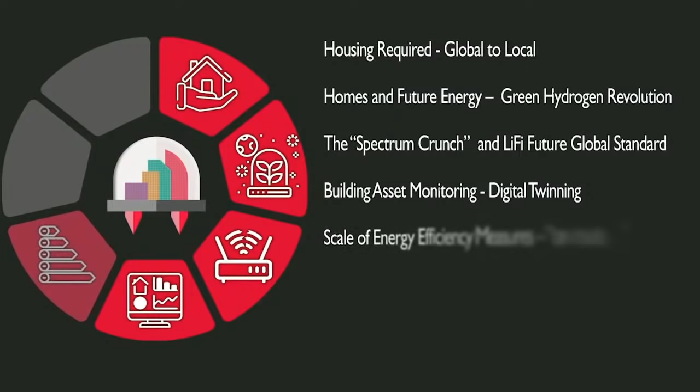Today I'm going to cover a number of things: future housing requirements from local to global, the green hydrogen revolution currently underway, the spectrum crunch, and new technologies to come such as Li-Fi and how we'll incorporate this into buildings and assets in homes of the future. Also building asset monitoring and the role of digital twinning in future sensors, which is becoming really interesting and starting to take off. The scale of energy efficiency measures which are en route and definitely going to happen, so it's useful to plan and look at that route map. And the mixing of terms - net zero, carbon neutral, and zero carbon - we'll briefly touch on that.

Finally, some of the areas we currently work in the construction sector - our operations, delivery, and products - actually wouldn't be included in some of the net zero requirements of procurement by local authorities right now. As a result, we need to make sure that instead of focusing entirely on net zero, which might dissuade people from undertaking fantastic work in materials and other areas, we keep that momentum going and include it under a Horizon Net Zero type approach.

In addition, because people are also living longer, there isn't the same cyclability of homes coming back onto the market. So taking the population growth over the next 80 years, plus people living longer and the lack of recyclability of housing coming back onto the market, collectively roughly 2.1 billion new homes will have to be built in the next 80 years.

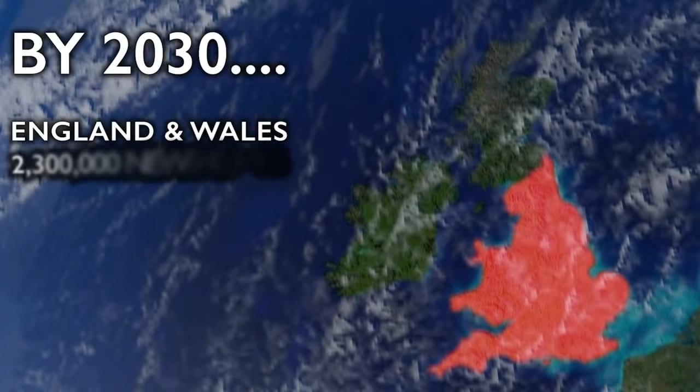To give you a sense of scale, that's equivalent to building the whole of Europe seven times in the next 80 years. In England and Wales, by 2030 - just the next 10 years - roughly 2.3 million homes will need to be built, equivalent to building the whole of Yorkshire and the Humber regions all over again.

In terms of Scotland, Scotland's new housing need will be roughly 260,000 new homes in 10 years' time by 2030, equivalent to building the whole city of Edinburgh again.

Green hydrogen is really starting to take off, and we've seen significant investments coming into this area just now, both from utility companies and oil and gas companies, with major global companies switching investment, particularly into green hydrogen. It's also useful to know your hydrogens.

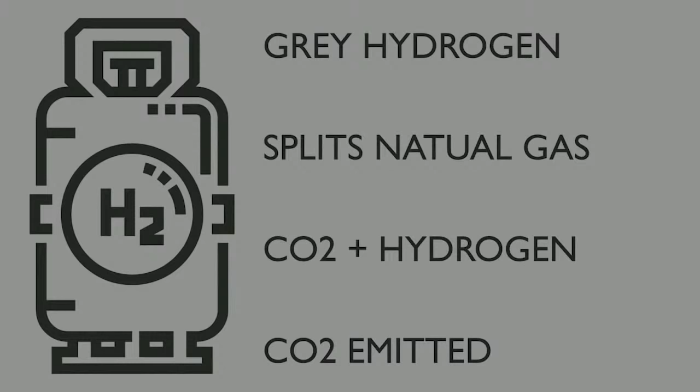Quite a bit of the hydrogen we see today is known as grey hydrogen, which splits natural gas into CO2 and hydrogen, but unfortunately still emits the CO2. Blue hydrogen has also been gathering pace recently, where the residual gases are stored or reused.

But green hydrogen is the one most people are favouring, because in green hydrogen we split water into hydrogen and oxygen by electrolysis, and that electrolysis is powered by wind and sun, so it's using renewable energy.

Goldman Sachs projected a $20 trillion future global market value for the hydrogen sector, with the predominance of that being green hydrogen. For the UK economy by 2050, it'll be worth £320 billion.

One thing we've all noticed with the COVID era, working from home and various other changes, is that we're all utilising the internet and Wi-Fi far more. And it's amazing how far it's come.

The Wi-Fi development has been over a period of about 30 years, of which the vast majority of the infrastructure was built in the last 10 to 15 years. It's amazing - internet users in 1995 were 16 million. Now, 24 years later, there are 4.8 billion.

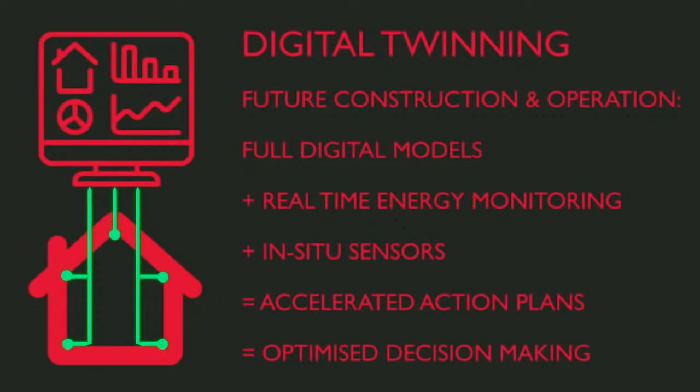With COVID, there's been lots of changes, as you may be aware. The lack of people going into work because they're working from home is creating an adaptation and also a requirement for city authorities to think about how they adapt and renew their city centres.

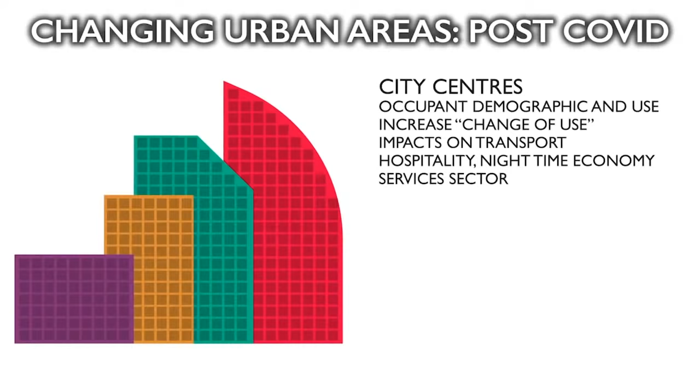In addition, we have the growth in the potential of 20-minute neighbourhoods, in suburban or other parts of cities, where people feel that they have access to and can live fairly sustainably within their own neighbourhood within a 20-minute walk or cycle, and that all of the facilities and services are there, particularly more so if people can also do home working.

One of the things I'd like to raise, an area we're going to be looking at in Edinburgh, is the potential utilisation of gap sites within future 20-minute neighbourhoods. When looking at a 20-minute neighbourhood plan, what are the potential gaps? If there are gap infill sites or regeneration sites, how do you align the 20-minute neighbourhood aspirations with the future utilisations of those gap sites?

And also the integration with transport needs and also the amenities. It's all sorts of things that could be changing. For example, nursery provision locally, because people are no longer going to their office as much, they're actually working from home, and they would rather use the nurseries which are close to the home as opposed to the one that was near the city centre, near their office.

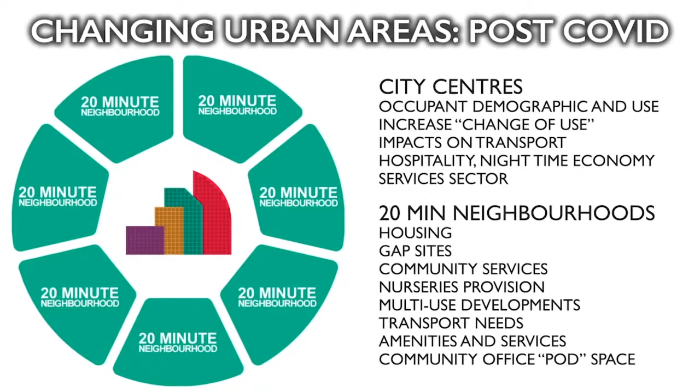So in terms of that, we've also got changes to the nighttime and city hospitality and culture factors to come too. With our future buildings, there are changes of use coming, and we know from the banking sector between 2003 and 2008, a huge number of banks then built new buildings, moved into different or brand new Category A buildings, and that left a huge number of office buildings and other things that came up for refurbishment or change of use. We see the same going forward again.

So in likelihood, if this is the case, be aware. It's very useful to look out for the opportunities for refurbishment towards net zero. Before you even touch the building that you're going to convert or change the use of, do a sound insulation test first, before you put any holes in walls or floors.

This will avoid over-specification. It allows you to assess the existing sound insulation requirements, whether for domestic or non-domestic use. Another feature is where some are going just now with office conversions - we've seen entrepreneur Zhu Weiping putting forward plans for the east of London to turn 20 offices into 2,000 individual pods. So really quite exciting, different changes to come.

I'd like to spend a few minutes on the future and timeline of energy efficiency measures. There's a lot of activity coming over the next 30 years, but specifically in the next 15 years. I've put together a small timeline of some of the changes occurring across the UK, whether in England, Scotland or Wales, and features around the targets for net zero. The top half of the timeline refers more to domestic properties, and the lower half refers to general policies or non-domestic buildings.

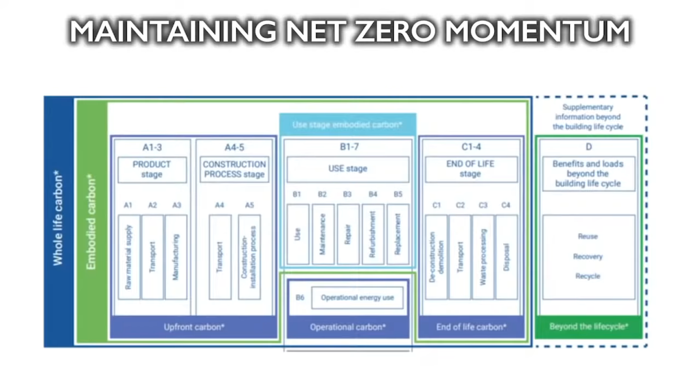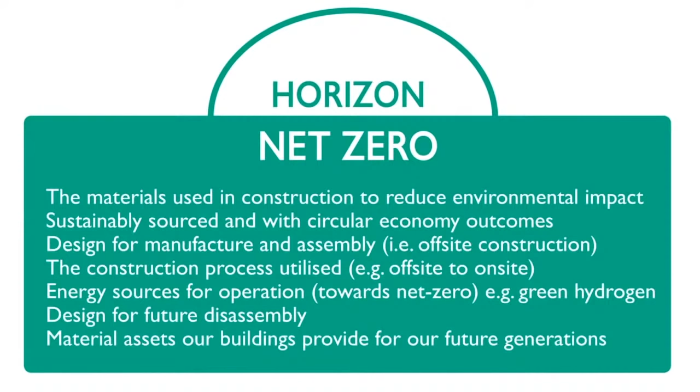My suggestion is that we maintain the net zero momentum we'd like to get to, but could we introduce an interim framework now that allows us to capture all of the great things the industry is doing—what I call horizon factors: off-site construction, design for manufacture, design for future disassembly that will support future generations in the material assets of buildings and infrastructure they'll inherit in 100 or 200 years, circular economy approaches, and sustainability. By involving these in Horizon Net Zero, there are a number of benefits towards a future carbon legacy, as outlined in the bullet points on this slide.

Taking this forward into a calculation, we could currently look at net zero factors for calculation of our carbon emissions equivalent for net zero construction, and our upfront carbon leading up to that, both for new build, refurb, and operation. So we can now produce potential reporting outputs for a numeric carbon value.

But there are many other things we do in estate strategies, our building and other operational strategies, which also support legacy factors that may not currently be included in net zero—sustainable sourcing of materials, designing for future disassembly, utilization of off-site construction, utilization of digital twinning, incorporation of renewable energies. These all play a key part but may not yet be included in carbon calculations for net zero. Hopefully they'll be fully standardized in the future.

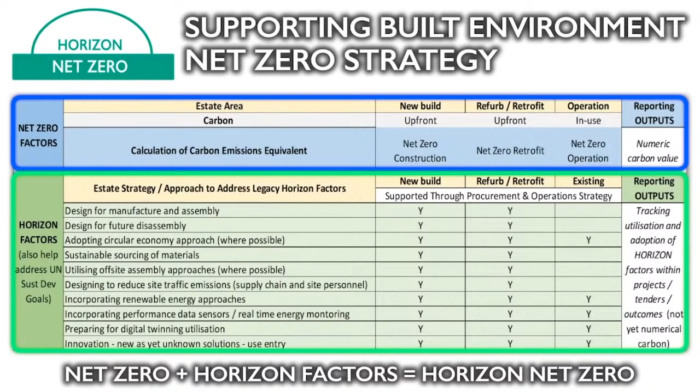So my suggestion is that we still continue on net zero where we can, and try to keep the momentum going on all these horizon factors we're doing. Then, when in the future we can calculate all of this more effectively, we could almost backdate and look at what the carbon savings were at that time, now that we know the calculation assessment process for all these great things we've done over the coming years.

So finally, embedding this approach, we can calculate net zero carbon operations, then add net zero carbon construction. We embed our horizon factors in our procurement, design approach, and build and operational approach. That builds up to give us Horizon Net Zero. It gives us time while international standards are readying and standardizing what will be the zero embodied carbon approach. And when that's ready, we move into that net zero embodied carbon approach without fear of legal complications from definitions or calculations that weren't set.

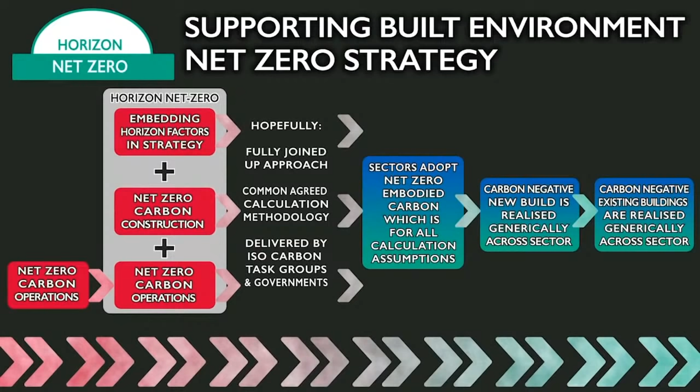And we first go after carbon negative in new build beyond that, then carbon negative in existing buildings. All of this helps in that timeline to reduce our carbon by 2040, 2045, and 2050.

Thanks so much indeed. I'm sorry I've run through so many different things, but I hope it's been useful and it may spark some thoughts and interest. Thank you very much.

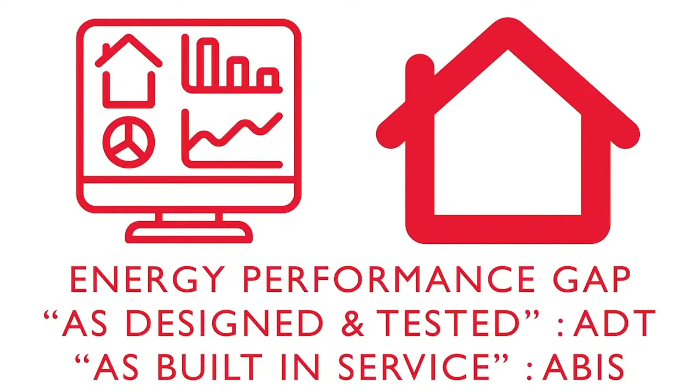Finally, the consultation proposes specific measures to address the performance gap between as-designed and tested (ADT) performance and as-built-in-service (ABIS) performance. Regular viewers may remember these concepts appeared in the 2020 revisions of BS 5250. The Future Homes Consultation expands this further by considering verification and test methodologies to ensure specified products and systems are used correctly and perform as intended by designers.

So what might the specification of a future home look like? The 2020 Part L consultation outlines two approaches under consideration as an interim step, with both aspects likely to form the basis of the 2025 standards.

Option 1, referred to as Future Homes Fabric, proposes a 20% improvement over current Part L standards for CO2 emissions, achieved through a fabric-first approach, with insulation, glazing and airtightness specifications brought to the forefront. This specification may still use gas boilers, but supplemented by technology such as wastewater heat recovery.

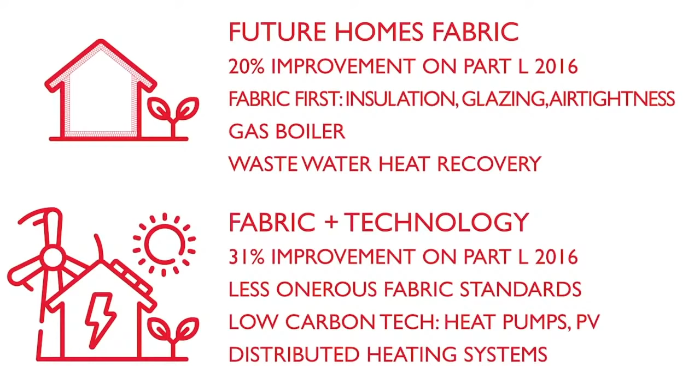Option 2, Fabric and Technology, is less onerous regarding fabric standards, but places considerably more emphasis on low-carbon heating, such as heat pumps, renewable energy systems like PV, and even systems such as distributed district heating networks in higher density areas. This would deliver a 31% reduction in emissions over Part L 2016.

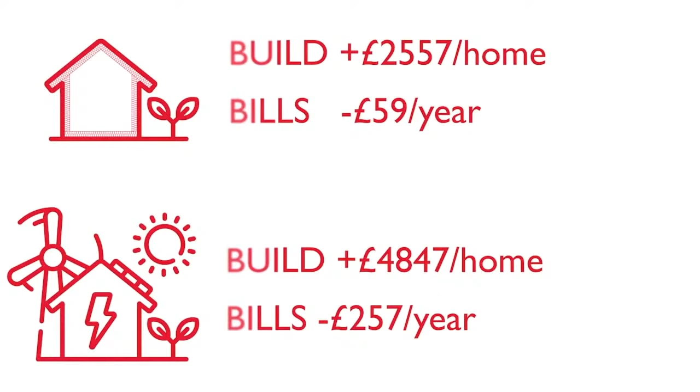At an estimate of £4,847 per home, the Fabric Plus Technology approach increases build cost by almost double that of Option 1, but delivers substantially greater savings on energy bills at £257 a year compared to £59 a year.

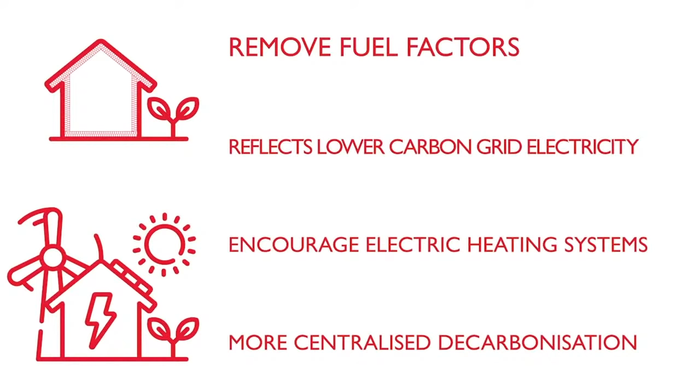It is also proposed to remove fuel factors from assessments, reflecting that grid electric heating now has lower carbon emissions than gas heating. Shifting housing to more electric heating, both via heat pumps and less efficient direct heating, also allows continuing efforts to decarbonise grid generation, reducing the carbon emissions of housing without affecting homeowners directly.

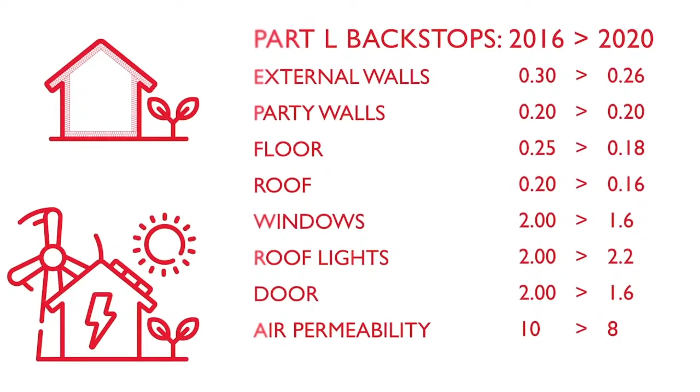Whilst the U-values and airtightness levels in the Part L 2020 consultation do not advance far beyond the current backstop levels, these are more subtle changes which show the intention is not so much to push existing methods further as to alter the range of approaches used towards decarbonising housing.

Combining these approaches gives us an idea of where the 2025 specification may be heading, with near-passive standard fabric insulation and advanced low-carbon systems. However, the standard is not expected to be overly prescriptive beyond setting backstop levels, leaving the way clear for innovative approaches to meeting the requirements.

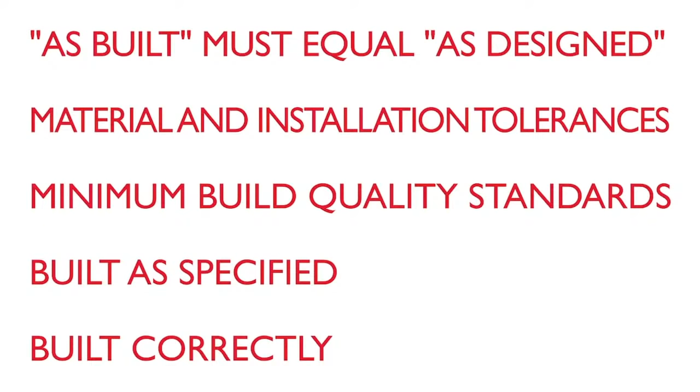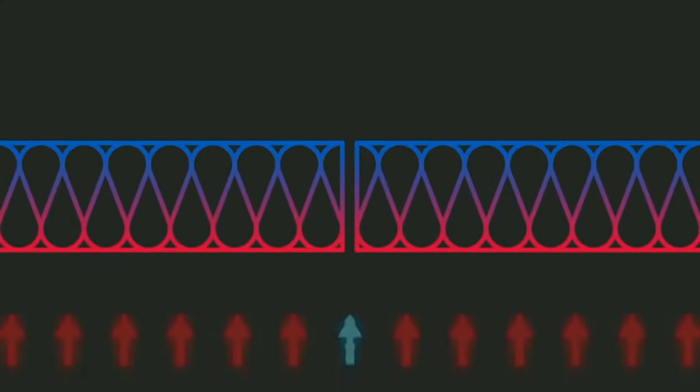The principal build quality issues identified are insulation gaps, thermal bridging, and several aspects of airtightness, and steps are outlined to mitigate each through a combination of installer training and awareness, good design and detailing, and appropriate usage of products and materials. Insulation gaps occur where poorly fitting insulation boards allow a significant degree of convective airflow through gaps between adjacent boards, and between boards and surrounding structures.

This airflow effectively bypasses the thermal insulation, leading to a shortfall in energy performance between the in-situ energy use compared to design values. Whilst it's tempting to think of this as purely an installation issue, steps can be taken at design stage to reduce the potential for installation problems to arise.

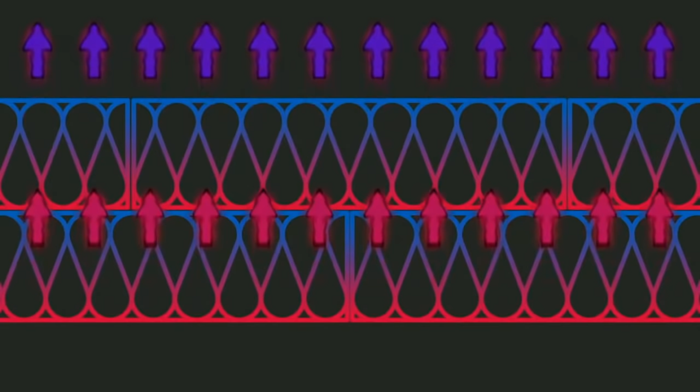Using continuous layers of insulation and sizing areas so that cutting of boarding is minimized can dial out problems before they arise. Ensuring materials are specified appropriately can also avoid situations where a contractor must work out how to fit a square peg into a round hole, often with little guidance as to the implications.

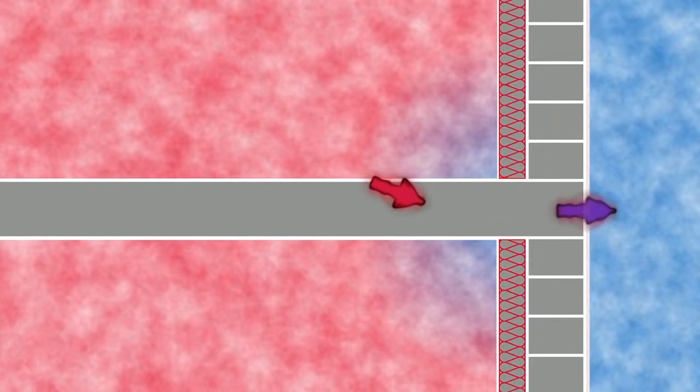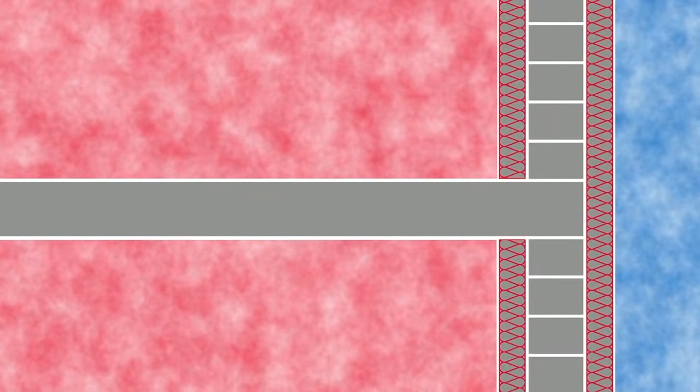Thermal bridging, by contrast, is largely a design problem, where ensuring insulation layers are continuous and no parts of the heated envelope are left uninsulated happens mostly on the drawing board. In this case, the primary issue is ensuring that other parts of the structure are able to accommodate a layer of insulation. Whilst features like foundation and floor zones are typically fairly straightforward to adequately insulate, door and window openings can present a much more challenging scenario.

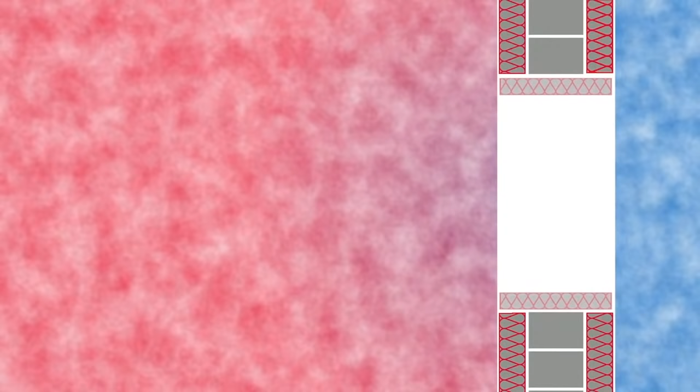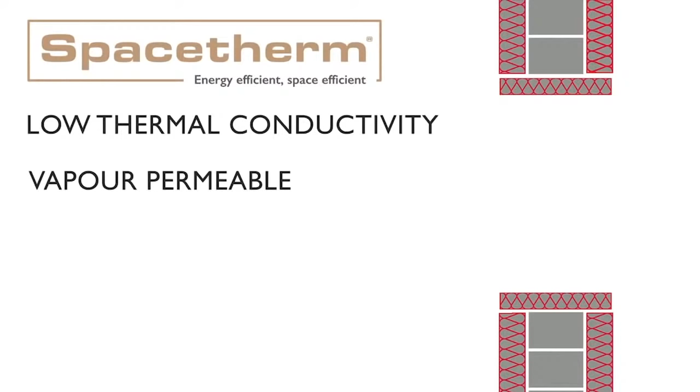Good material choice is often the key to achieving an effective thermal bridge design, where balancing thickness, thermal conductivity, structural and hygrothermal properties is critical. Systems such as our Spacetherm aerogel range can allow thermal performance to be boosted at any point of the building envelope with minimal thickness and without trapping moisture. It's also available as a Euroclass A2 rated variant for use in fire-critical situations.

The effects of material choices can also be less obvious. For example, using a non-ventilated roof construction with an underlay such as our Roofshield allows insulation to be packed fully into the eaves of a roof, extending over the wall head without any concerns regarding compromised airflow.

The consultation proposals around airtightness cover four areas: incoming services, airtightness of structure, airtightness around openings, and internal service runs.

This is a topic we've covered fairly frequently in our webinar series so far, and a lot of the build quality issues identified are very familiar. As fabric insulation levels increase, minimising this air leakage becomes a bigger influencing factor on the overall energy performance.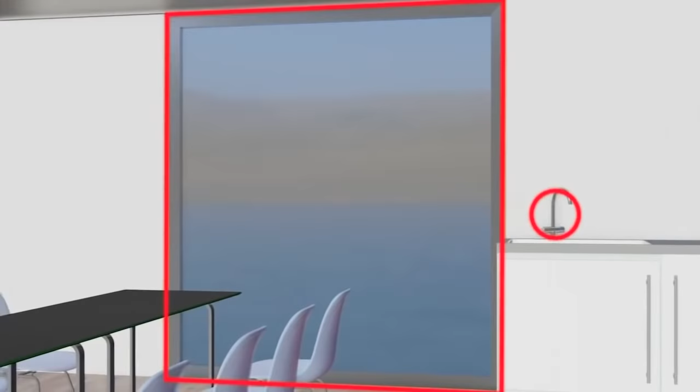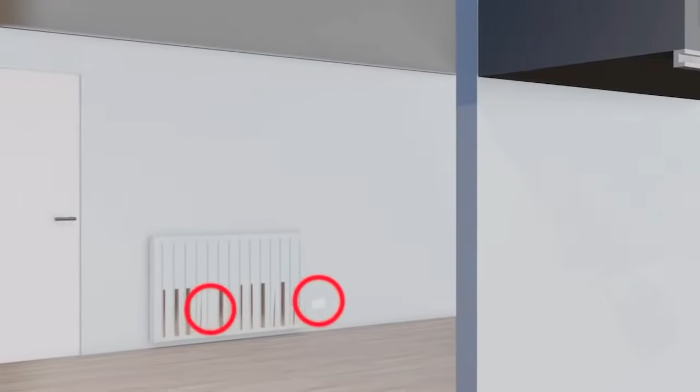Already, homes contain a huge variety of services and other penetrations. Smart controls, systems monitoring, automation, AV and networking systems will only increase this, making robust solutions for integrating building services without compromising airtightness critical going forward. This is particularly true in high-density developments, where using Wi-Fi for everything may not be ideal due to interference concerns.

As with a lot of these build quality issues, the solution of sealing the surfaces is deceptively simple, but in practice it requires careful design to minimise air barrier penetrations, and well-trained installers afforded the time and the space in tight schedules to do the job right.

Here again, though, exist some technical solutions that can design out a lot of these problems if correctly executed and integrated into the design at the correct stages. Moving the airtight layer well away from the service zones by using a membrane such as our vapor-permeable Wraptite air barrier provides a durable and robust solution to ensuring design airtightness targets are met.

Solutions like Wraptite can be applied to most types of base construction, from traditional timber frame to high-rise modular developments. But not all construction types are created equal when it comes to airtightness and low-carbon construction.

Between the drive to reduce carbon emissions associated with the built environment and the necessity to adapt construction sites to accommodate social distancing and COVID-secure requirements, moving processes off-site is increasingly attractive.

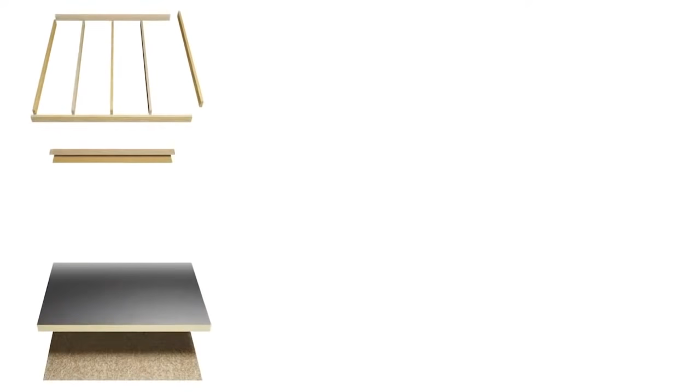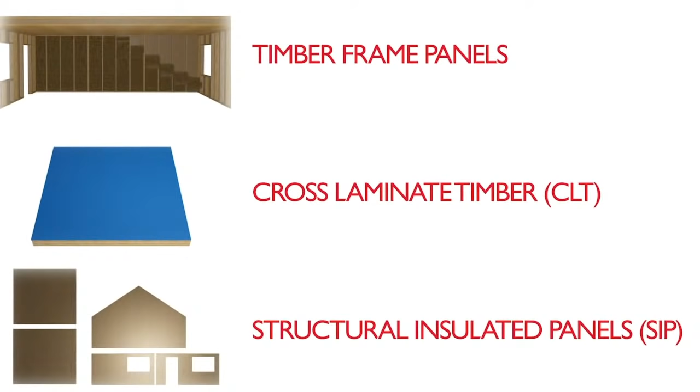Although manufacturing timber frames or structural insulated panels in factories is nothing new, these systems, along with cross-laminated timber, open up important advantages as regards to quality control and fine tolerance manufacturing that are key to closing the performance gap between as-designed and as-built. The use of sustainably sourced timber also reduces the carbon intensity of the project, giving a double benefit alongside the simpler process to achieving low energy use.

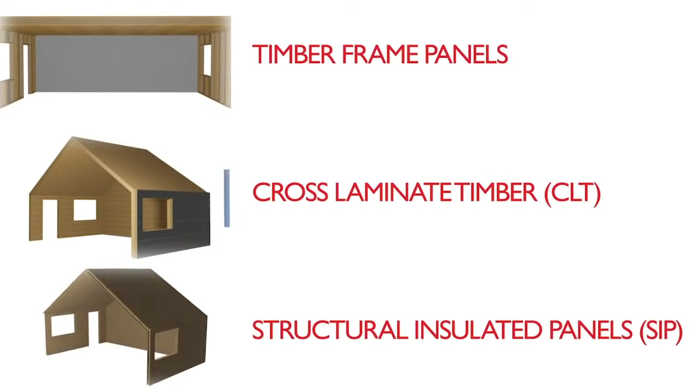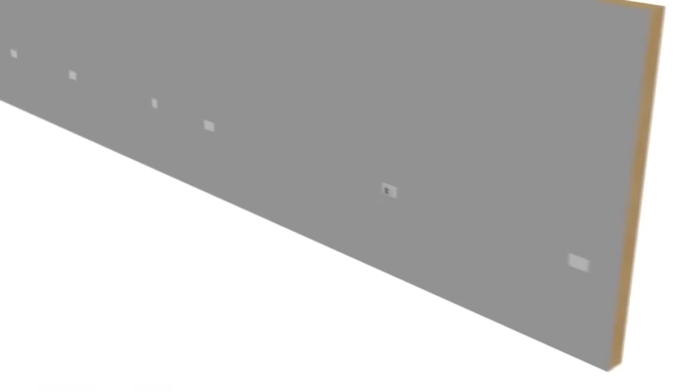Alongside these panel-based systems, volumetric systems are increasingly finding use, both across high and low-rise sectors. In these systems, fully complete modules with services, membranes and insulation already incorporated are assembled off-site, then delivered and connected into whatever configuration that project requires.

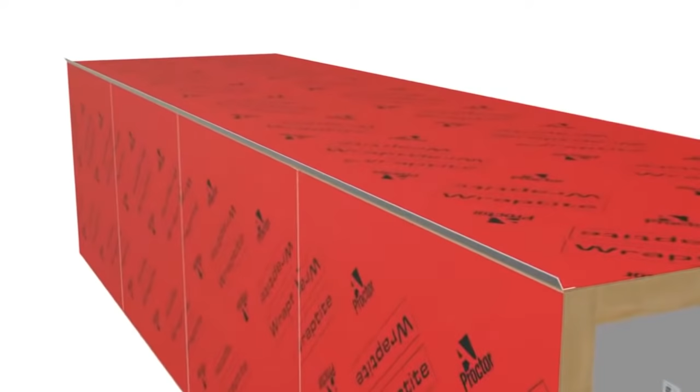What all these systems have in common is the use of off-site assembly, where the more tightly controlled factory environment facilitates closer tolerances and reduces unexpected problems, particularly when aligned with the principles of design for manufacturing and assembly, which focus on ensuring designs minimize different components and facilitate the simplest assembly process possible.

A factory environment makes it far more straightforward to integrate systems and services on a schedule, which minimizes the impact of one process on another.

The foundation of all the factors we've discussed today is a well-considered and fully integrated design process. Designers, contractors and suppliers are all working together to ensure high-performance specifications are successfully executed to produce high-quality buildings. Making sure information is available to everyone seamlessly and good communication is maintained throughout the project is key. And with that in mind, we'll now move on to the Q&A session.